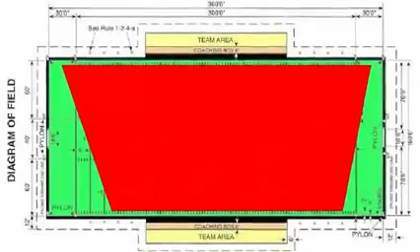This is a profile of the World Trade Center Building 7. It was a tall trapezoidal-shaped building, situated a little more than 100 meters north of the North Tower across Vesey Street. It's 47 stories, or 174 meters, or 571 feet tall. Its footprint is basically the size of an American football field. It has 58 perimeter columns and 25 core columns. It was a massive building.

The 23rd floor housed a specially reinforced bunker for the New York City Office of Emergency Management. The tenants of the building in 2001 included Salomon Smith Barney, the IRS Regional Counsel, the U.S. Secret Service, the DOD, CIA, New York City Office of Emergency Management, Security Exchange Commission, and several banks and insurance companies. Needless to say, it was a very security-minded place.

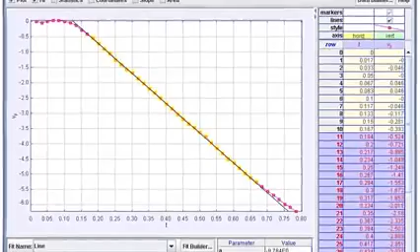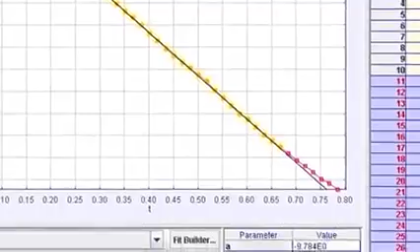A student took a video of me dropping a soccer ball from a ladder. I imported the video into Tracker, then marked the position of the ball in each frame. Tracker captures the position and time data from which it can compute velocity and acceleration, and graph anything versus anything else, basically. This is a graph of velocity versus time for that soccer ball as it's dropped. Notice that the slope, this basically is a linear graph when you take velocity versus time when there's a constant acceleration. So note here, the slope is nearly constant at about 9.8 meters per second squared.

Notice how in the end it deviates from a straight line, because as the speed builds up, the drag increases, and so you're actually getting a noticeable effect due to air resistance, even just from a ball dropping a few meters like that, okay? So air resistance, as subtle a force as it is, is detectable.

This is a graph for the roofline of WTC-7. Note that for well over 2 seconds, the graph is linear, so the acceleration, similar to the soccer ball, is constant. The slope of the linear portion of the graph is essentially equal to the acceleration of gravity, within the margin of error of the measurements. In other words, for this building, even though it is falling straight down through its own supporting structure, free fall actually happened. Notice also that there's a sharp onset of free fall.

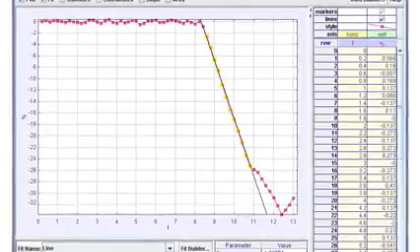The building is holding steady, then it simply lets go. In the approximately 2.5 seconds of free fall, it falls over 100 feet, the equivalent of about 8 stories. Free fall is motion under the influence of gravity alone; all resistance must be removed. Some people argue that the resistance in the case of WTC-7 was not significant because the falling mass was so great.

It's true the falling mass was great, but the strength of the supporting structure was even greater. The structure was built to support 3 to 5 times the actual load.

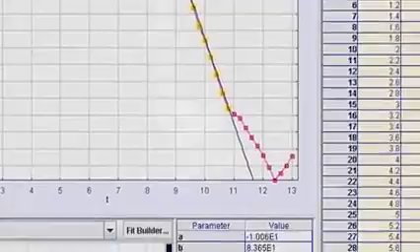When it does eventually engage the structure, the rate of acceleration slows, then actually decelerates. That's what you'd expect when you have engagement between the falling mass and the structure. NIST is basically saying the top part is crushing the structure, it should have been looking like that all along. The building has the strength to decelerate this falling mass. It's just that it wasn't happening.

During free fall, all of the potential energy is converted into kinetic energy. But if any of the energy is used for other purposes along the way, such as crushing the concrete or deforming the steel or throwing things around, there will be less energy available to be transformed into kinetic energy because some of that energy was getting siphoned off for other purposes.

In the case of WTC-7, all of the energy was transformed into kinetic energy. So therefore, the work needed to destroy the structure was not available. It had to come from some other source. The fact of free fall is literally proof of demolition.

NIST desperately wanted to claim that free fall did not occur because they knew that actual free fall would be a smoking gun for demolition. So instead of a head-on comparison of the acceleration of the building to the acceleration of gravity, they focused on the completely meaningless notion of free fall time.

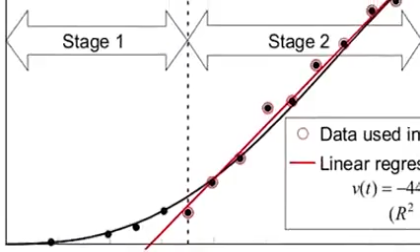But they did one more thing. Amazingly, someone at NIST added a nice straight red regression line through their stage 2 data. They even gave the equation of the line. It shows that the slope is exactly equal to the acceleration of gravity.

So that red line is a flat out absolute admission that they're even closer to the acceleration of gravity than my measurement. They were right smack on the money. They're on that number accepted as acceleration of gravity in feet units, okay, 32.

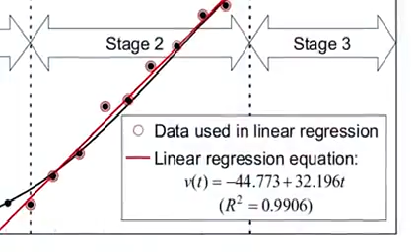The red line on this graph means that NIST acknowledges WTC-7 came down without resistance and without doing any work for over 100 feet. It means all support for 8 stories was suddenly removed by something other than the falling mass. It literally means that NIST's final report confirms WTC-7 had to have been a demolition.

The NIST WTC-7 report has never been peer-reviewed. There's been no forum for critiquing or correcting the final report. This does not constitute science. It is instead an authoritarian declaration by a government agency that demonstrated repeatedly its unwillingness to consider the one hypothesis that could actually account for their observations.

This was a 47-story building they've been watching all day. This is like watching the collapse of an active volcano. And the dust from it is not unlike that from a volcano.

We are on the phone with New York Fire Department Lieutenant David Restuccio. Can you confirm it was number 7 that just went in? Yes, sir. And you guys knew this was coming all day? We had heard reports that the building was unstable and that it eventually would either come down on its own or it would be taken down.

Conspiracy theory is a way of trying to discredit inquiry. It's perfectly legitimate to say, here is a very serious event that occurred. It killed thousands of people right off the bat. It's killing firefighters still today. It's used to justify war. It's killed thousands of American soldiers. It's killed millions of Iraqis and Afghanis. It's literally in the millions. And to consider that investigating the roots of that is somehow not legitimate, or that you have to be psychologically impaired, some sort of conspiratorial thinking.

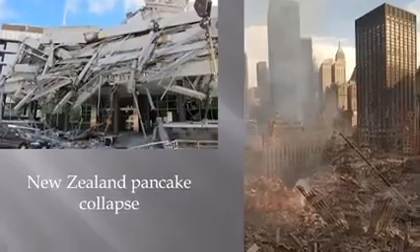This is a collapse in New Zealand from the earthquake, unfortunately. And what do we have here? What do we see? We see pancakes. We see large chunks of floors. This was a 6 or 7 story building that came down. What did we see at ground zero? We had 110 floors. Did we see one complete floor? How about the roof? Did we see the roof? There was no load on top of the roof. We see nothing. We see cut steel, all cut up steel, but no one-acre size floors.

This is just with the sound off, same speed, and I'm going to slow it down here. What do we see? We see them racing down one side. We see the corner still standing, coming down one side only. We don't see entire floors impacting. We see partial floors. What about this corner? Why is that still standing when this is rushed way ahead, dozens of floors ahead? Quite unusual. It doesn't match what we were told.

The one thing that really caught my attention in one of the videos was looking at the North Tower coming down, stuff being thrown out to the side, and it seemed like it was getting thrown way out to the side. There were clearly heavy chunks of material being thrown very great distances. I literally stopped the video on the television screen and took out a ruler and stepped through a little bit of it, and I looked up some distances off the internet for the width of the building and everything. I estimated the speed of ejection horizontally of some of these chunks of stuff, and I came up with an estimate around 60 miles an hour. That seemed so anomalous to me. I figured, no way. How do you throw, there had to be tons of stuff being thrown horizontally at such high speeds, and this was high in the building.

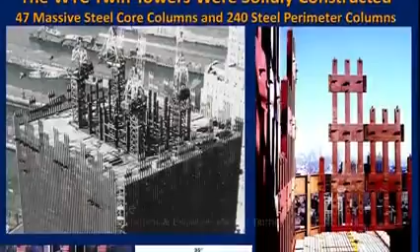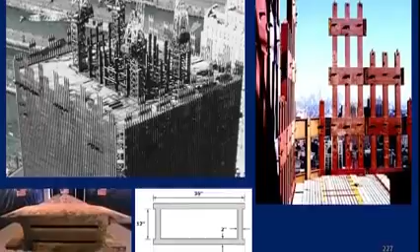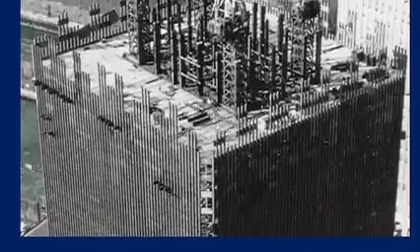This building had 47 massive core columns, at the base almost solid steel, 52 inches by 22 inches, thinning to 2 inches at mid-height, and to the lightest part of the structure up at the top, as little as 3/8 of an inch thick, those steel members. So when you see the building coming down in the videos, realize what we're talking about here. There's more steel on the facade of this building, with these 14-inch square tube columns every 3 feet 9 inches marching across this building, than there is windows. That collapse had to come down through this steel.

Here's the North Tower. We're told this upper block drove the rest of the building down. The planes hit here.

There's no movement down from here until about now. Once again, this upper block is destroying itself in what can only be described as a miniature controlled demolition of the top 15 stories. There's nothing left to drive the rest of the building down at any speed.

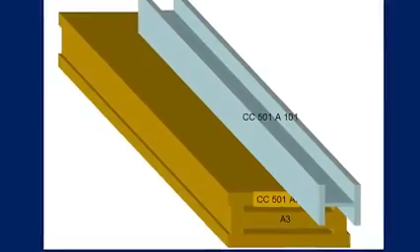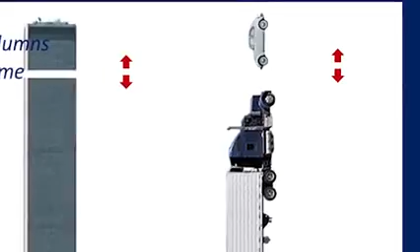Let's look at the structure. The upper portion is the lightest, the lower portion is the heaviest. Let's compare. If you look at Newton's third law of motion, there's an equal and opposite reaction against a lighter object striking a heavier object. It's the same if you drop the lighter object onto the heavier object: equal and opposite destructive force. Which one will give up the ghost first?

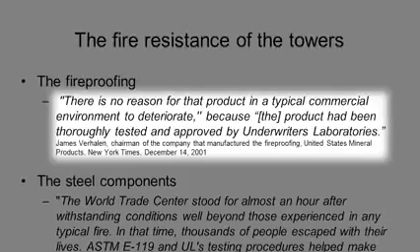The fire resistance of tall buildings like those at the World Trade Center is ensured through testing of samples prior to construction. My former employer, Underwriters Laboratories, tested and certified the fireproofing used in the World Trade Center towers, as seen in this quote from the company that manufactured the fireproofing. UL tested the steel components used in the World Trade Center towers to meet the 1968 New York City Fire Code. That meant the column assemblies had to withstand 3 hours of intense fire, and the floor assemblies had to withstand 2 hours of intense fire in a test furnace.

Of course, the biggest problem with this is that one of the towers failed in 56 minutes. Here's the fellow that told me about this testing, Loring Knoblauch, who was the CEO when I worked there.

He later wrote to me and a few others saying, 'We tested the steel with all the required fireproofing on it, and it did beautifully. As we do not do follow-up service on this kind of product, we can give only an opinion on the test sample, which was indeed properly coated, and we tested the code requirements, and the steel clearly met those requirements and exceeded them.'

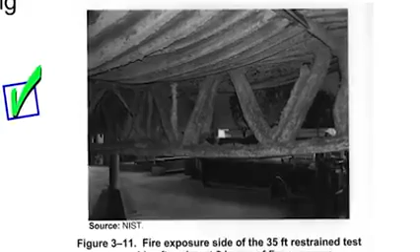As I said, UL later participated in the NIST World Trade Center investigation, which was a clear conflict of interest. Here's a photo of one of those floor assemblies after the standard method ASTM E119 was performed. During this test, it was held in a furnace at a temperature over 1,000 degrees Celsius for a period of 2 hours. You can see the slight effect.

The midsections of the assembly sagged a few inches, but the frame was not damaged and the floor held its load without failure. The weight loaded was twice as great as what was known to have existed in the World Trade Center. These experiments were performed on 4 separate floor models, all of which had less fireproofing than was known to have existed in the World Trade Center on September 11th.

Even within NIST computer models, the sagging and pulling effects that NIST's explanation depends on were not seen. NIST was simply not able to demonstrate this critical pull-in effect. Physical tests were not done, although that would have been decisive. The computer models did not indicate these forces either.

As a result, NIST made some fraudulent changes to the scenario. All the fireproofing was stripped off a large section of the computer-modeled building, and exaggerated temperatures were applied for twice as long as NIST had said occurred in the failure zones. That is, they applied exaggerated temperatures for 90 minutes instead of 45 minutes. But even then, the pull-in forces were not created in the computer.

So NIST did something completely paradoxical: it disconnected the floors before applying an imaginary pull-in force. This is the opposite of science. This is not anywhere near science. No physical test was done. The computer models did not give them the answer they wanted, so they did something completely fraudulent, which is exactly what they did.

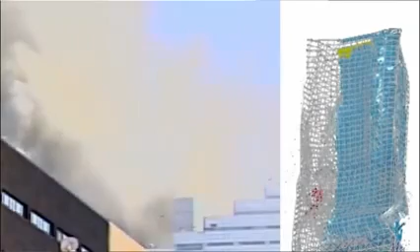And then NIST claims that it travels laterally, but they don't even show us that. But forget that—just the fact that we have massive failures in the structural system throughout the height of this building in the first few seconds before the overall collapse, wouldn't you expect to be seeing that reflected all the way up to the top?

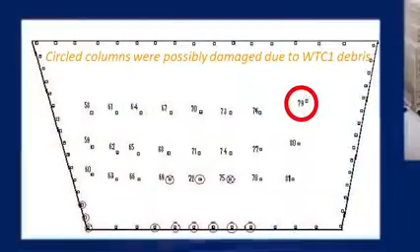If we don't take out all 24 core columns and all of the 50 or so perimeter columns at once, virtually simultaneously, what's going to happen? That building is going to fall to the path of least resistance.

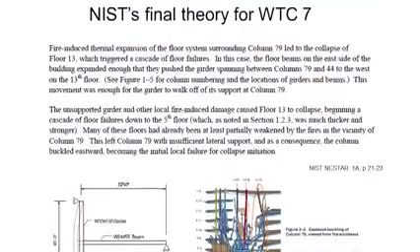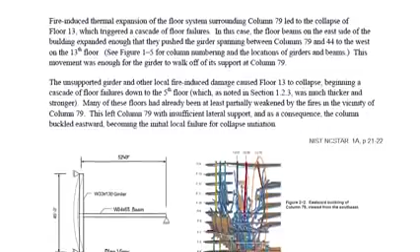Asymmetrically, it'll fall over. They're saying that fire-induced thermal expansion of the floor system surrounding column 79 led to the collapse of floor 13, which triggered a cascade of floor failures. In this case, the floor beams on the east side of the building expanded enough so that they pushed a girder spanning between 2 columns, and this caused the girder to walk off its seat.

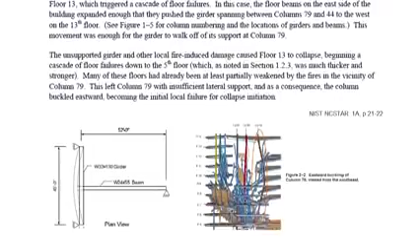The most recent explanation for both the towers and World Trade Center 7 is false. There's also a good amount of evidence now that points towards the explosive demolition of all 3 buildings, including the finding of incendiary and explosive materials in the World Trade Center dust.

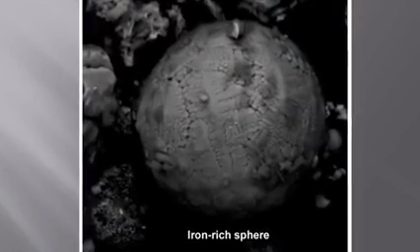One of the things found in the dust is small iron microspheres. These are very small, round spheres, and the only way they could have gotten round is if they were molten at one time. They have a lot of iron in them, so it's more evidence that we had temperatures high enough to melt steel or iron.

What is this stuff? Can thermitic material cut or melt steel? First, what is thermate, thermite, or thermitic material? I had never heard of thermite before 3 years ago, ever. Thermite is a mixture of iron oxide and aluminum, and when you add sulfur to it, they call it thermate.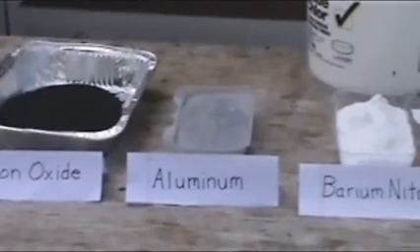I decided to do a little research on thermite to find out what it could or could not do. I could not obtain nanothermite, so I made small quantities of old-fashioned thermate, which is not considered an explosive, with ingredients that are legal and readily available.

Thermate is difficult to ignite. An ordinary fuse is not hot enough, but a magnesium strip, which burns white hot, will ignite the thermate, giving off heat and white smoke.

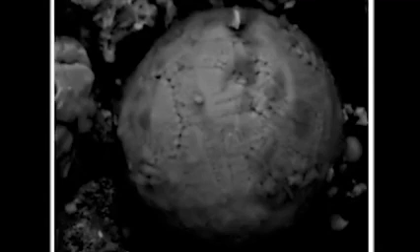In addition to giving off heat and white smoke, thermate produces lots of small spheres of iron. These iron spheres are a natural byproduct of thermate, not from any steel - just like those iron spheres found all through the dust. Using an ordinary steel box tube, I had a slot milled along one edge.

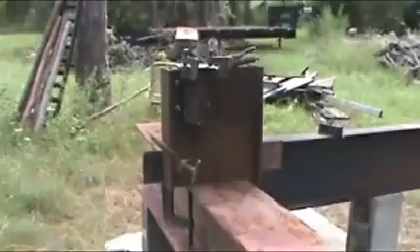Welding the bottom and using clamps on top to hold the powdered thermate in, I bolted it to a steel beam vertically. I called this device my thermitic box cutter. With only 1.5 pounds of thermate - less than 1/100th of what the National Geographic experts used for their experiment - not only was I able to melt steel, but it also sliced a vertical cut.

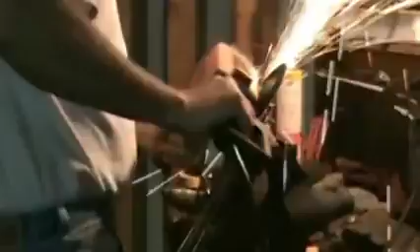So I made a slightly larger thermitic box cutter and used two 3/8 bolts drilled and tapped on one side of the connection. It only took a slight twist to break it completely off.

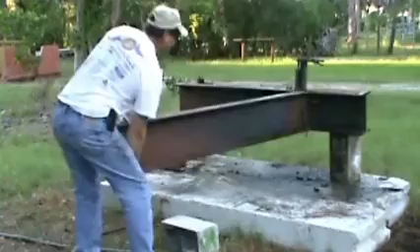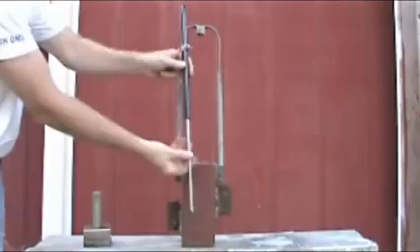I noticed as the thermate burned, it tended to lose its cutting power, perhaps because it could expand into the area where the box cutter previously burned. So I built a piston-driven box cutter using a compressed car hatch piston. I added sheets of tungsten to minimize the burnout and allow the piston to slide better. I then bolted my contraption to the flange of the column and ignited the white-hot magnesium.

It appears that not only can thermate melt steel, but it can also cut a vertical column. Can thermate make pressure pulses and/or dust puffs? I guess it can. Can thermate cut bolts?

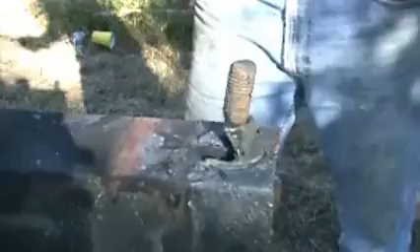I guess it can. Can thermate be configured to cut just the bolt head? I guess it can, and without any evidence on the other side. I had a replica of a segment of the WTC box columns made up, and like the Trade Center iron workers, I bolted the segments together.

I made two sets of my 2-bolt blasters, placing them in the access hole. Let's listen to another eyewitness: it sounded like gunfire - bang, bang, bang, bang, bang - and then all of a sudden, 3 big explosions.

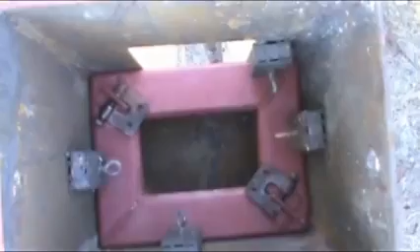Is it even possible that thermate could do this? I guess it is. I made a 4-sided internal box cutter that was split into 2 pieces so they could be inserted inside the column. I think my box cutter blew about 50 feet up, consuming valuable energy and trimming my trees in the process. Nevertheless, the inside of the column was cut about 3/4 of the way through.

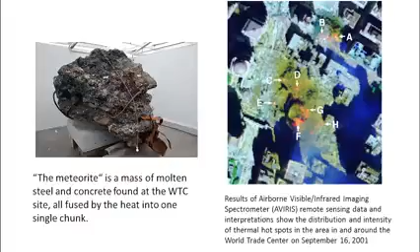NIST failed to address the actual collapse dynamics of the World Trade Center towers, and in doing so, they ignored a great deal of the most important evidence related to the fall of the towers. That includes the sudden onset of collapse, the near free-fall acceleration from both towers, evidence of explosions and high bursts of debris coming off the perimeter walls, and a lot of the other evidence of molten metal in the rubble piles and the high temperatures, which I'll speak about today.

NIST reported gas temperatures as high as 1,000 degrees Celsius within its report on the World Trade Center destruction. It's important to note that these are gas temperatures, not the temperatures of solid materials. But one problem with the maximum temperature cited by officials is that there are many eyewitnesses who claim that metal had been melted at the World Trade Center, and we know that could not have resulted from these temperatures.

Here are just a few of the eyewitness statements that were made. The first is from a man who worked for John Skilling, the design engineer of the World Trade Center towers. He said, 'As of 21 days after the attack, the fires were still burning and molten steel was still running.' A chaplain at Ground Zero said, 'I talked to many contractors, and they said they actually saw molten metal trapped. Beams had just totally been melted because of the heat.' Dr. Keith Eaton of the Institution of Structural Engineers said, 'I was shown slides of molten metal which was still red hot weeks after the event.' Another doctor from Johns Hopkins School of Public Health said in some pockets now being uncovered, they're finding molten steel.

The temperature required to melt steel is 1,538 degrees Celsius, far above the maximum gas temperature cited in the official report. So the evidence for solid temperatures is much higher than what officials say the gas temperatures were. In a structural fire, steel temperatures lag behind gas temperatures for a number of reasons, including the thermal conductivity of steel, the effects of convection, and the fireproofing that's applied. Achieving a steel temperature of 1,538 degrees Celsius at the World Trade Center would require gas temperatures well above that, and far above the maximum of 1,000 degrees Celsius cited in the official U.S. government World Trade Center reports.

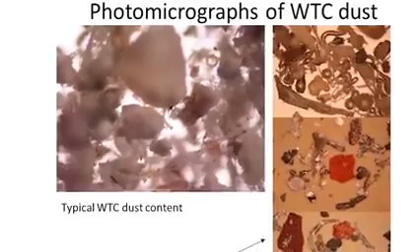I've seen evidence of the previously molten metal myself in the form of metallic microspheres that I've found in nearly all the dozen World Trade Center dust samples that I've examined. Here are photomicrographs that I took of the first examples I received in 2007. On the left you can see what the content of a typical World Trade Center dust sample looks like under a microscope, at 100x. On the right are photomicrographs of particles extracted with a magnet from the bulk of the same dust sample. At the top you can see the many metallic-looking microspheres and other droplet-shaped metallic particles. Below that are examples of red chip-like materials and other metal-looking objects.

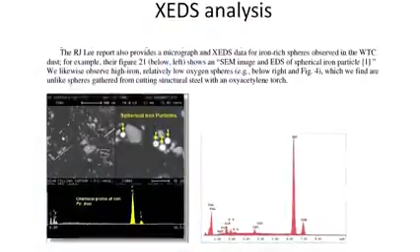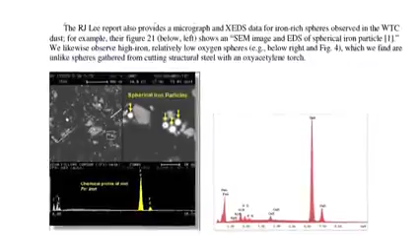The spheres indicate not only that the iron or silicate was molten at one point, but that due to the small size of the spheres, a violent disturbance of some kind would have been necessary to shatter the molten metal into the small sizes seen. Various explosive or incendiary processes are likely explanations. The result was that the spheres we found were very high in iron and low in other elements. This agreed with the findings of the R.J. Lee group. You can see the trace in the lower section on the left from R.J. Lee and how it matches with the trace on the right from our team. The temperatures required to explain this evidence cannot be explained by the temperatures given in the official reports on the World Trade Center.

To provide even more corroboration for these findings, we need only look to the official U.S. government report that preceded the current one published by NIST.

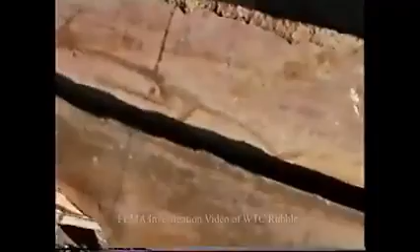And it slices right down through that plate, all the way down here. It's tough to see, but it's all concave where it's pushed in. Keep in mind that this thing should be able to survive that sort of outward force. I think the only way I'm going to find anything in this pile is with a magnet.

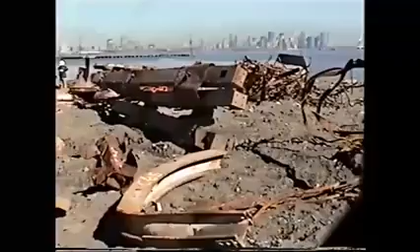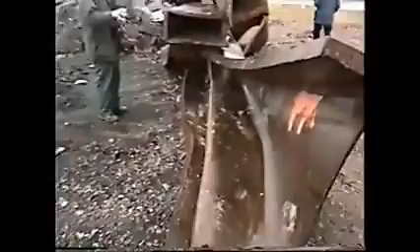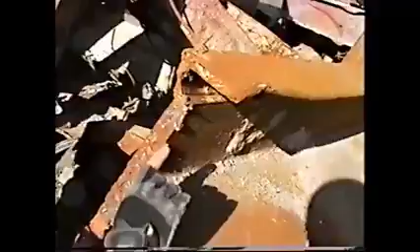The first report was from FEMA, the Federal Emergency Management Agency. Appendix C of their report provided strong evidence of extremely high temperatures at the World Trade Center in the form of highly corroded and eroded steel samples saved from the buildings after they were destroyed. FEMA described samples of steel that had been thinned to razor sharpness. In some cases there were inexplicable holes in the steel. The fire engineering professors who found the samples could not come up with an explanation for it. They also could not explain the sulfidation of the steel—that is, steel had been chemically changed at the microstructural level in ways that indicated a chemical eutectic mixture had been achieved between sulfur, iron, and oxygen, causing steel to melt.

You'd get down below and you'd see molten steel running down the channel rails. Like you're in a foundry. Yeah, like lava. Like it was lava from a volcano. This is like watching the collapse of an active volcano. And the dust from it is not unlike that from a volcano.

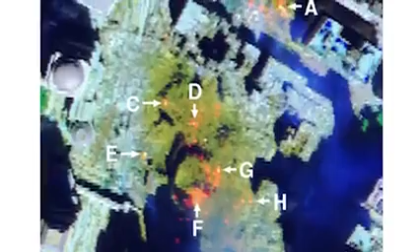Surface temperatures in the debris piles were found to be as high as 750 degrees Celsius a week after 9/11.

As you've heard already today, there's an explanation for all this officially unexplained evidence. This explanation is that the thermite reaction was present and occurring at the World Trade Center on 9/11 and afterward in the pile at the World Trade Center site.

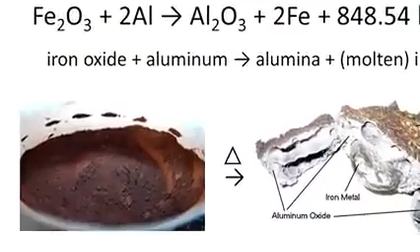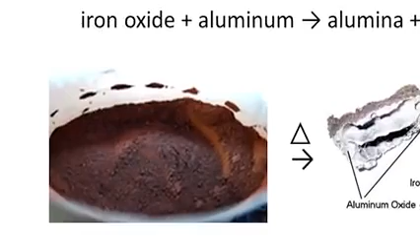The thermite reaction is an extremely exothermic chemical reaction between aluminum powder and a metal oxide. The metal oxide is typically iron oxide, which you can see here on the left with the reddish color. The temperature at which thermite burns approaches 3,000 degrees Celsius for some mixtures, which would explain the evidence discussed so far in this testimony. The products of an aluminum iron oxide thermite mixture are molten iron and aluminum oxide, which quickly forms a white dust cloud as it cools.

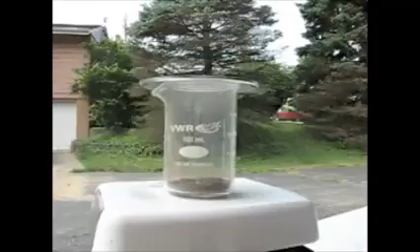When we look at the ignition residues, they're strikingly similar to the appearance of the World Trade Center dust particles that were extracted with a magnet. Both are the same colors, they show the same metallic microspheres, and both exhibit the same kind of vesicular formations that suggest high temperature reactions or explosive effects.

Gravity alone could not cause the top section to disintegrate. When an object is in free fall, there are no internal stresses. It should have hit the ground in one piece, but it didn't. Some of the debris is clearly being accelerated by forces other than gravity. These effects can be caused by late firing explosives, which can produce a white smoke trail. White smoke, consisting of aluminum oxide, is a byproduct of the thermite reaction.

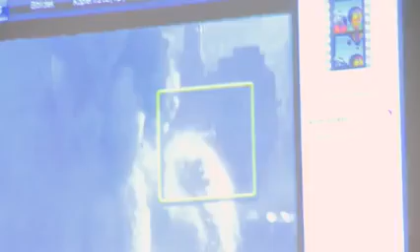Up until this point, I thought all the white dust coming out of the towers was crushed wallboard. There was plenty of wallboard and it's white. But this is not what wallboard would look like if you crush it and throw it out the window. These are rocket trails. It goes out like this and then it changes direction 90 degrees, and it still tracks a white smoke trail afterwards.

What are we looking at here? This is rocket fuel. This is outrageous. And when I saw this the first time, I said, that could be our red-gray chips.

Incendiaries, which act by means of heat, must by necessity be thermitic. And this is what we observed: molten iron in the rubble, molten iron coming out of the South Tower, and these iron spheres being formed, unambiguously indicating that thermite must have been there one way or another.

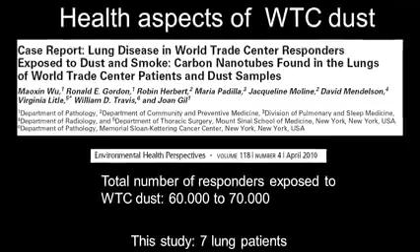60 to 70,000 people were exposed to the dust for an extended period of time. They looked into the lung tissue of World Trade Center responders. The picture on the left is from lung tissue, and they found thread-like tubular structures in 4 out of 7 ill patients, in numbers ranging from 11,000 to 230,000 per gram of wet tissue. This is the same material which they found also in the World Trade Center dust.

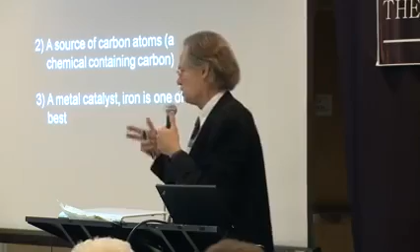Formation of carbon nanotubes requires 3 conditions to be fulfilled. You must have very high temperatures, you must have a source of carbon atoms, meaning an organic chemical present, and you must have a metal catalyst, among which iron happens to be one of the best. This means that ignition of the nanothermite should create ideal circumstances for formation of nanotubes.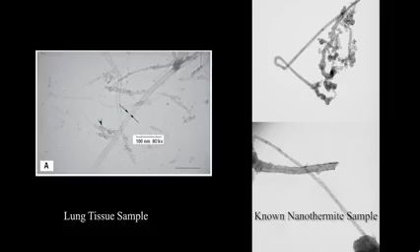We could prove that your story is false. And I don't use the word prove lightly. But when you have people coming up with a story that violates the laws of physics, not just once, but repeatedly, you can say, okay, that story's wrong. What we have to do now is hope that the people of the world have at least enough grasp of science to understand what we want to explain here.

The idea that these buildings came down because of explosions, and even more specifically because of explosives planted in the building, was an idea found all over the place on 9/11 — on the scene by eyewitnesses, even on television, on the radio, in the paper. Very common. And it's important that we know that. It changes our perspective on this.

So here's my first video. The reporter here is N.J. Burkett, working for ABC News 7, standing very near the towers. 'This is as close as we can get to the base of the World Trade Center. You can see the firemen assembled here, the police officers, FBI agents. The towers—a huge explosion now raining debris on all of us.'

So this man had to pick up, he and his companion, the camera and run for their lives. I don't see any evidence that Mr. Burkett had a particular conspiratorial frame of mind, and he certainly didn't come around after the event — this is his spontaneous judgment, standing in a place of great danger. He says, before the material even hits the ground, 'a huge explosion now, raining debris on all of us, we better get out of the way,' and he runs. Just so you know, he also had to run for his life when the North Tower came down a little bit later, and he described that as a blast.

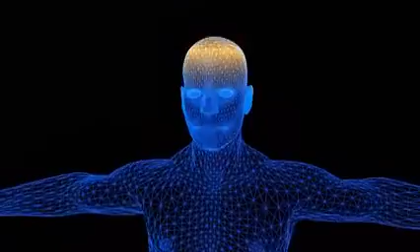A few years ago, I finally ran into the doctor who examined Bobby, and he gave me an outline. He told me not to look at the pictures, but he gave me an outline of all his injuries. All his injuries were in the chest and in the face. Back of him, no problem. His skull was still intact, but everything was blown off his face. He lost his arm and had severe lacerations of his chest. So from what I talked to the doctor about, Bobby died instantly.

The bottom elevator, the glass, just flames exploded out the front of the World Trade Center. Glass flew everywhere. What happened was I was down in the basement.

All of a sudden we heard a loud bang, and the elevator doors blew open. Some guy was burnt up, so I dragged him out. His skin was all hanging off. So I dragged him out and pulled him out of the parking lot. This was what was left on it. When I pulled him out, I looked up and the second bomb blew off.

Bobby walked into the lobby, or might not have even made it into the lobby, and there was a huge explosion. In an explosion, in a detonation, the air that shoots out is supersonic. The gases shoot out at supersonic speed, and then the heat follows it.

The 9/11 Commission hearings state that a fireball from the plane hitting went from the 93rd up to the 98th floor, because the plane went in on an angle. The idea again, the commission saying that only a fireball created this damage - the fireball supposedly that came down does not have that energy. Remember, every window in the North Tower was blown out. You have an area of 208 feet by 208 feet. It's impossible that a fireball created that damage.

So therefore, my thing with Bobby was that he was walking into the towers, there was a huge explosion, it killed him instantly, hit him in the face, hit him in the chest, obviously took off his arm, and that's how he died. And remember, the 9/11 Commission report refused to acknowledge the testimony they got from firemen, from policemen, from the EMS workers of these explosions that were taking place in the sub-basement. Both the 9/11 Commission report and NIST lied about that.

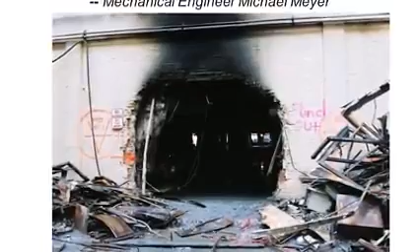Mechanical engineer Michael Meyer has stated it is physically impossible for the C-ring wall to have failed due to the impact of plane debris of any kind in a clean, neat circle, like the one seen here at the inside of the C-ring. This is the signature of a shaped charge explosive, and it definitely cannot be, he said, from an impact from any kind of plane debris. Meyer spent years in aerospace, structural design, and the design and use of shaped charge explosives.

If a plane or any object, any impactor, would come in at an oblique angle, which the official story says, and goes diagonally through 3 rings, you're not going to have a perfectly round exit hole. If it's the front of a fuselage or even a round engine, it would have to impact coming perpendicular to the wall. The official story says there is a single exit hole on the inside of the C-ring. This is a graphic taken from the Washington Post immediately after 9/11 from Pentagon sources, DoD sources itself.

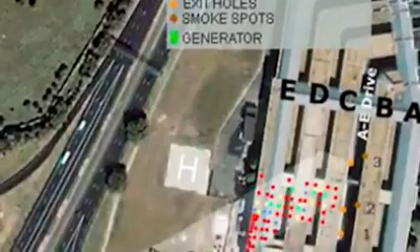There are 3 exit holes listed from the Pentagon's own immediate sources to the Washington Post after 9/11, not just one. This is an aerial photograph that the Pentagon provided to all the media right after 9/11—you can see it on the web. This is the so-called official exit hole right here, but there are 2 others that perfectly match these 3 so-called exit holes from the Pentagon's own released data, and here it says exit holes, plural. The government lied about inside explosions.

Do you think it's telling the truth about the one and most famous outside explosion in the 5 famous frames from the 2 videotapes of the security cameras in the parking lot of the Pentagon, which were released in the Moussaoui trial in May of 2006?

The 85 videos that were confiscated by the FBI—there was an FOIA request. The FBI FOIA officer was honest and did an analysis of those 85 videotapes, and came back to the person who requested it that there were only 2 of the 85 that in any way could be interpreted as showing an impact on the building, and those 2 do not show a plane.

NORAD was notified about American 77 at 9:24 that morning, roughly 14 minutes before the Pentagon was officially hit. Why were the F-16s from Langley Air Force Base, about 130 miles away, not able to get to the Pentagon in time to prevent the attacks?

The 9/11 Commission claims that the Indianapolis Center did not notify the military even when, at 8:56, it lost this flight's transponder signal, its radar track, and its radio. The Commission claimed no one at Indianapolis had any knowledge of the situation in New York until 9:20. But television networks had started broadcasting images of the World Trade Center at 8:48, including, at 9:03, the crash of the second airliner into the South Tower. Millions of people knew about these events.

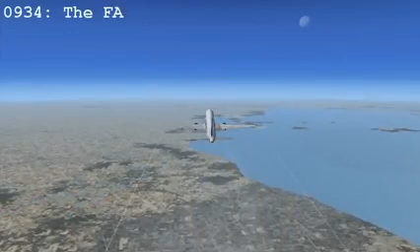In his 2004 book, Richard Clarke said that during his White House video conference, FAA Administrator Jane Garvey reported that at about 9:35, a number of potential hijacks, which included United 93 over Pennsylvania, had occurred. This conversation occurred while both Donald Rumsfeld and General Richard Myers had been listening. Brigadier General Montague Winfield, who had taken a leadership position in the Pentagon's National Military Command Center, recalled, "We received the report from the FAA that Flight 93 had turned off its transponder, had turned, and was now heading towards Washington, D.C."

General Larry Arnold, the commander of NORAD's U.S. Continental Region, indicated in a January 2002 interview that the military learned about United 93's troubles between the crash into the second tower and the attack on the Pentagon. By this time, he said, we were watching United 93 wander around Ohio. He also said that at 9:24, our focus was on United 93, which was being pointed out to us very aggressively, I might add, by the FAA.

This report by Arnold, who was involved in the events, differed radically from what the 9/11 Commission claimed, that the FAA never contacted the military about United 93.

I've seen the pictures. It looks like there's nothing there except for a hole in the ground. Basically, that's right. The only thing you could see from where we were was a big gouge in the earth and some broken trees. We could see some people walking around in the area, but from where we could see, there wasn't much left. Any large pieces of debris at all? No, there was nothing that you could distinguish that a plane had crashed there. That's really all you see is a large crater in the ground and just tiny, tiny bits of debris. There's been at least one report that the investigators out there, and there are hundreds of them, as I said tonight, have found nothing larger than a phone book.

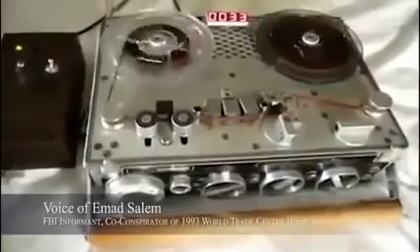We was starting already building the bomb, which is the one that went off in the World Trade Center. It was built by supervision from the Bureau and the DA, and we was all informed about it, and we know that the bomb started to be built. By who? By your confidential informant. What a wonderful, great case.

We know from many accounts of the Bush administration that there was also another powerful pro-war consensus within it, centered on Cheney, Rumsfeld, and the so-called cabal of PNAC, the Project for the New American Century, that before Bush's election had been lobbying vigorously and publicly for military action against Iraq. We know also that Rumsfeld's immediate response to 9/11 was to propose an attack on Iraq, and that planning for such an attack was indeed instituted on September the 17th.

I've called these events deep events—events with a predictable accompanying pattern of official cover-ups, backed up by amazing media malfunction and dishonest best-selling books. Some of these deep events, like the Kennedy assassination and 9/11, should be considered structural deep events because of their permanent impact on history. It is striking that these two structural events should both have been swiftly followed by America's engagement in ill-considered wars.

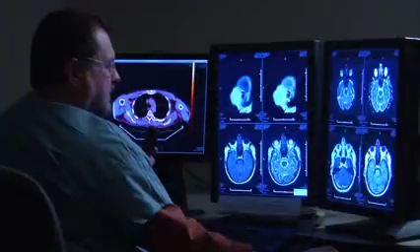The human brain is the most complex organism in the body, and thus the mechanisms by which the mind processes, interprets, and responds to information is equally complex. For example, the human brain is composed of hundreds of billions of neurons, each with thousands of synapses, creating a vastly complex and intricate neural network consisting of up to 100 trillion to up to a quadrillion synaptic connections. At any one time, this organ is processing an infinite amount of information, both from its internal and external environment, most of which we are unconscious of.

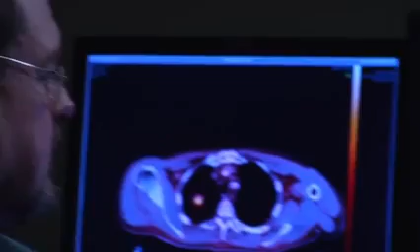However, it is often that information, of which we are largely unaware, that has the most significant influence over our thoughts, feelings, and behaviors. Even those thoughts, feelings, and behaviors that we adamantly believe to be consciously determined. We assume that when we are looking at something, we are consciously analyzing it based upon the visual information that is entering the brain from the eyes. But this is not entirely accurate.

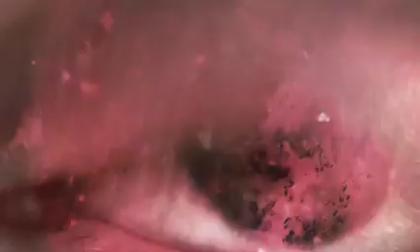In fact, visual stimuli transduced by the rods and cones in the eyes and sent by electrochemical signals to the central nervous system via the optic nerves does not go directly to the occipital cortex, which is the primary region responsible for processing visual information. Instead, it first goes to the lateral geniculate nucleus of the thalamus, another region of the brain that is part of the limbic system and important to emotional arousal. To put this in simpler terms, this means that you can experience an emotional reaction to something before you are consciously aware that you have even seen it, which in turn then affects how you see it.

Alternative explanations of political assassinations, terrorist attacks, and other national tragedies that differ from official state accounts are sometimes dismissed by the general public because they evoke strong cognitive dissonance, a psychological phenomenon which occurs when new ideas or information conflict with previously formed ideologies and accepted beliefs.

In psychology, a false belief generally refers to one that has been manipulated, often purposely and outside of the person's awareness, and sometimes in a very specific direction or misdirection.

The use of repression and terror, including threats of censorship, suppression of information, imprisonment, and torture by leaders to silence political opponents and dissidents, is not exclusive to authoritarian states. Such tactics can also be employed by leaders of democratic states, a fact that can be difficult for people to acknowledge, especially if it is not consistent with their belief system.

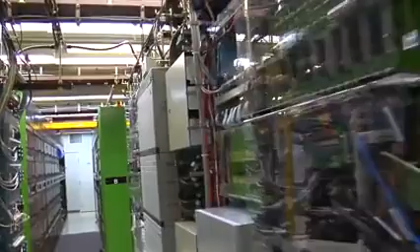The mainstream media are, in a sense, digging their own grave by adhering to a position on conspiracy theories which they could get away with back in the days of the Kennedy assassination, because they monopolized American access to information. They don't have that monopoly anymore, and they're losing to the internet. One of the reasons people are going to the internet and not to the mainstream media is if anyone is curious about 9/11, they know they have to go to the internet. So in a sense, I think technology has become a great ally for those of us who want the truth.

This is a big issue. I mean, it's not just the 9/11, it's not just the buildings or the science or the physics, but it opens up into a very, very huge issue out there.

No one person can tackle this issue, but it's my opinion that if you know about it, do something. Whether you're an artist, a poet, a singer, you don't have to be an engineer. Matter of fact, most of the more brilliant people out there are not engineers. They're very intelligent people who know what's going on. Not everybody can do everything, but everyone can do something. You can do your little part to help share what's really going on out there.

You need to wake up. You need to look at what's really going on, not just the myth, the propaganda. There are ways to bring about fundamental change in the way people think, in the way people coordinate together with government and so forth. Something of that sort is needed in the United States as much as any other country in the world. What does it take to actually trigger something akin to a revolution?

We have a power structure that's controlling what happens in the US government that's not operating in the best interests of the people of the United States. It's operating in the interests of corporations and a wealthy elite class and so forth.

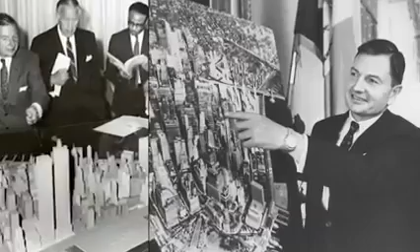Not all of it, but much of it, and we've done some wonderful things. And I have not given up on my country. I was at the original hearings when the Twin Towers were proposed in New York as a city planner, and I supported the building of the Twin Towers proposed by David Rockefeller to keep the financial district in the downtown. It was migrating north, and that's why it was built.

I supported it because I felt it made good planning sense, and I was well aware of the internal structure of this building. Very interesting structure, unique actually. I had done work in structural engineering. My first degree was in architecture. And so when I saw the videos of the collapse of the building, I said, something's fishy here. And it seems to me that my doubts have been confirmed. I have found nothing in the evidence that's been presented here to change my mind.

I've tried to be a fair panelist, and I went back and reread the 9/11 Commission report. I can tell you it doesn't improve with age.

I did my first Fulbright in the Soviet Union in 1978. I'm well aware of what an authoritarian state is like to live in, and I don't want that for my grandchildren. I want my open, free, democratic society back.

And so I think we have done a marvelous thing here. We have laid out, with the help of the experts, this evidence, and I think it's a great beginning. The price of empire is America's soul, and that is too high a price. We need to know the past, to understand the present and foresee the future.

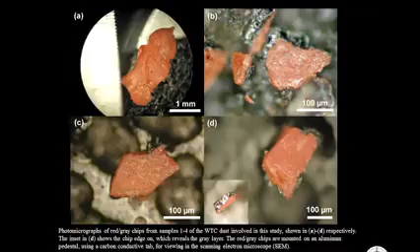No one faithfully viewing these hearings can be unchanged by them, as the panelists gave testament just now. This alone makes this event an unconditional success.

But although we know the institutions exist nominally to indict the crimes proved here, those institutions have turned against us. Where science is converted into fiction, what can we expect for civil liberties? Where bodies in motion, otherwise governed by universal laws, can be held in contempt, as with physical mass made unencumbered by those pesky laws of thermodynamics.

But when the mass media and every other institution of the land are willing to play along with contempt for laws of the universe, we've got more fundamental problems. I know that headlines will never be enough, I think all of us know that. But one thing I know for certain, although so many of them want free people thinking otherwise, we who are free are not lone wolves, not now and not ever.

Something other than physical laws binds us together now, us who gave witness to these testaments here, so wonderfully done. We might be exiles from the matrix of received wisdom from a pliant media. Here's to hoping soon for a world full of exiles.